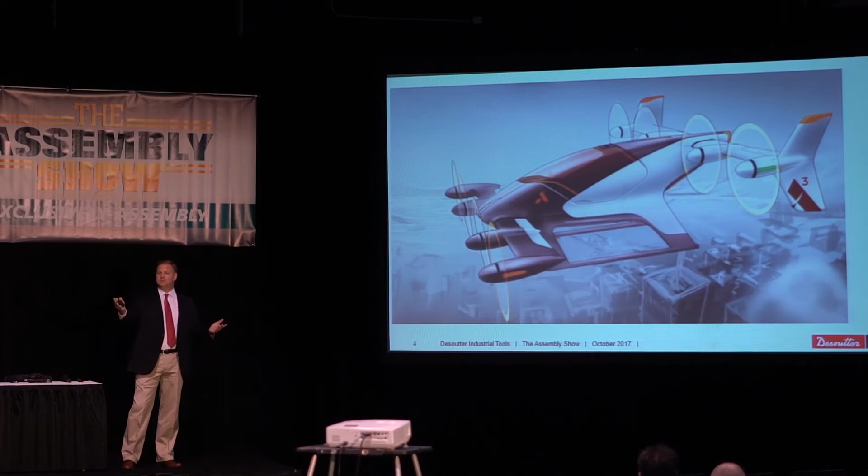Some yes, some no. But whether it's cars, trucks, or planes, they still all will need to be manufactured. And the way that is happening is changing, and it's changing quickly. We live in a changing environment. We're in a very different connected society than we were even 5 years ago, and that change will happen very quickly now.

There's many talks about Industry 4.0, so I'll try to move through this fairly quickly, but it's all relative to the Internet of Things, this connected world where our coffee maker, our assembly tool, our phone, our vehicle, all are interconnected, all can exchange data and information in a rapidly changing world.

Just in some numbers, by 2020 it's projected we will have 4 billion connected people. And even as you're sitting there, you're probably going to stay connected in some way to somebody else who's outside this convention hall. This represents a $4 trillion economic opportunity. By 2020, the projection is there will be 25 million different apps available to consumers. And by 2020, 50 billion embedded smart devices. So again, a rapidly changing landscape.

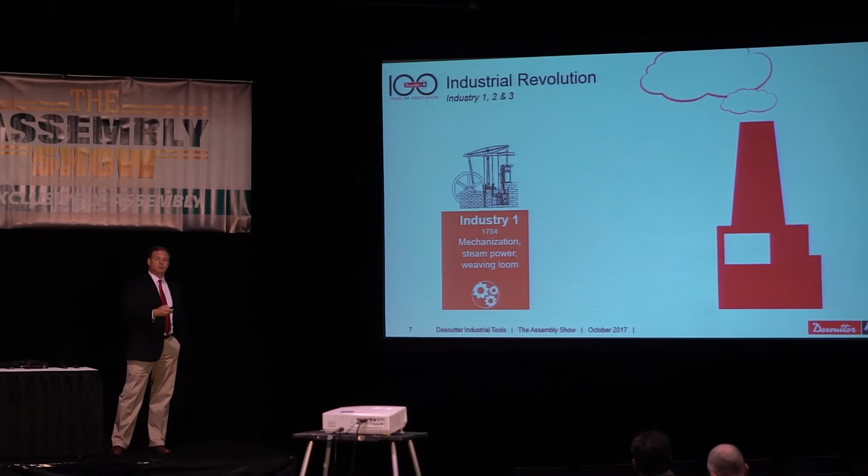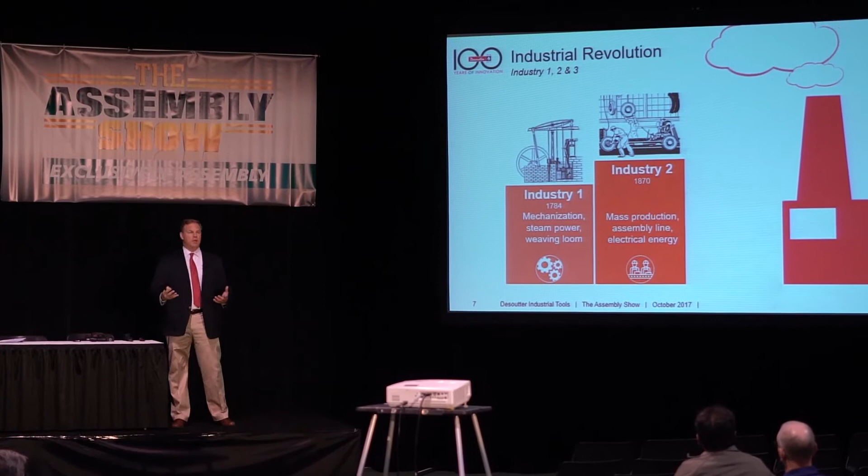And it all is reflective of what we call Industry 4.0, which follows, of course, the first three industries. Industry 1.0 being the introduction of steam engines into the workplace. That was followed, about 100 years later, by the introduction of the assembly line. We often think of this with Henry Ford, but it really started in the meatpacking industry in the 1870s. And then that was followed about 100 years later with the introduction of the microprocessor.

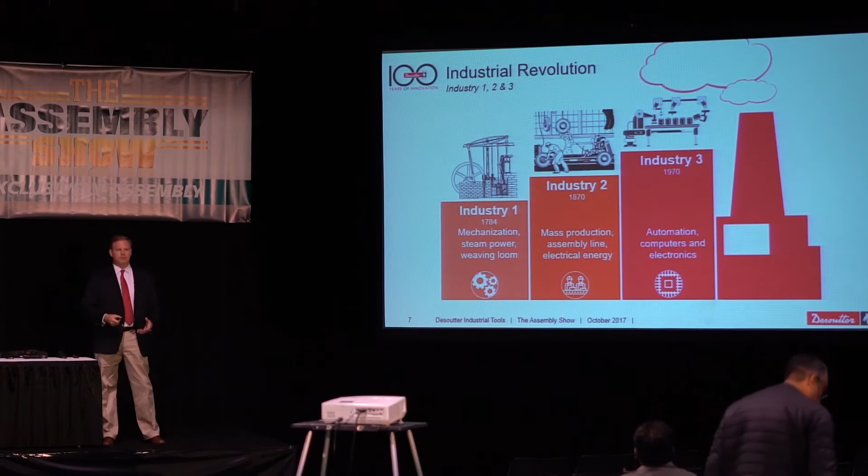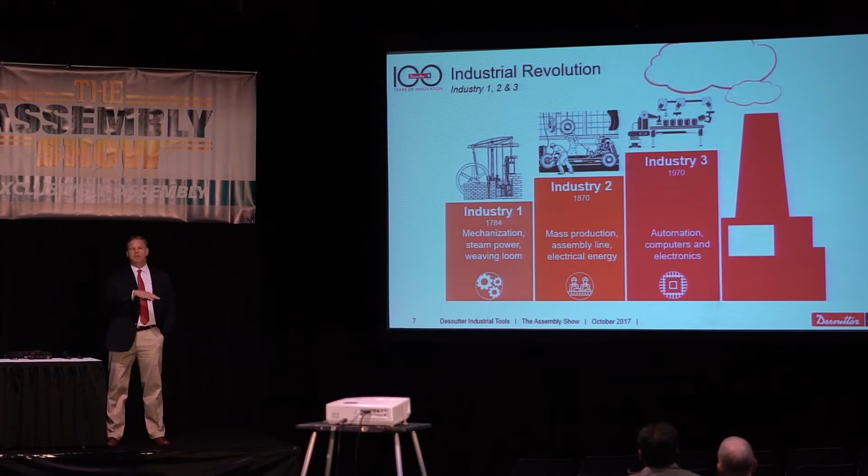And now we're moving to a more computerized world, with PLCs and things that can control our functions. But those are really the first three, and we've operated very much in this Industry 3.0 world for a long period of time now. The change is coming, and it's here, and it's upon us.

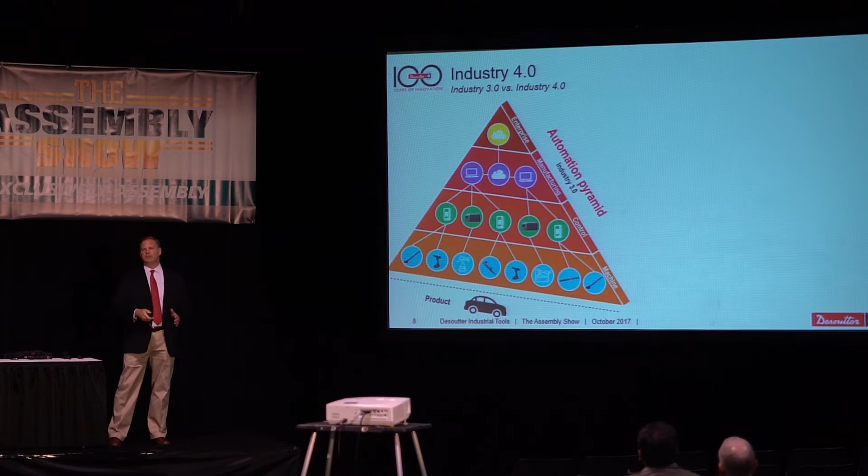Really the shift is from what was an Industry 3.0 world and way of thinking, which was rather linear. We had our tools, we had our PLCs controlling them, we were maybe collecting data on top of that in a very linear structure. The Industry 4.0 world is much more like a sphere of interconnectivity. We have multiple devices talking to multiple other devices or machines, and people interacting through this web of communication. It's important to think of this change so that it's not just a linear structure anymore, but really more like a three-dimensional sphere.

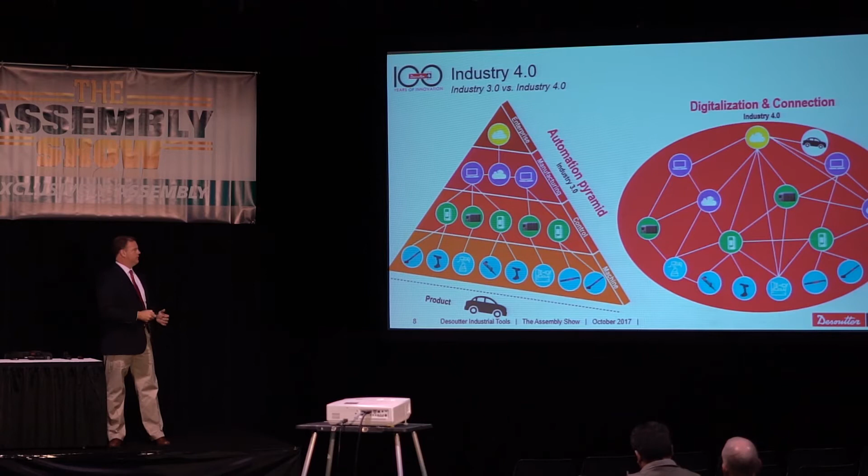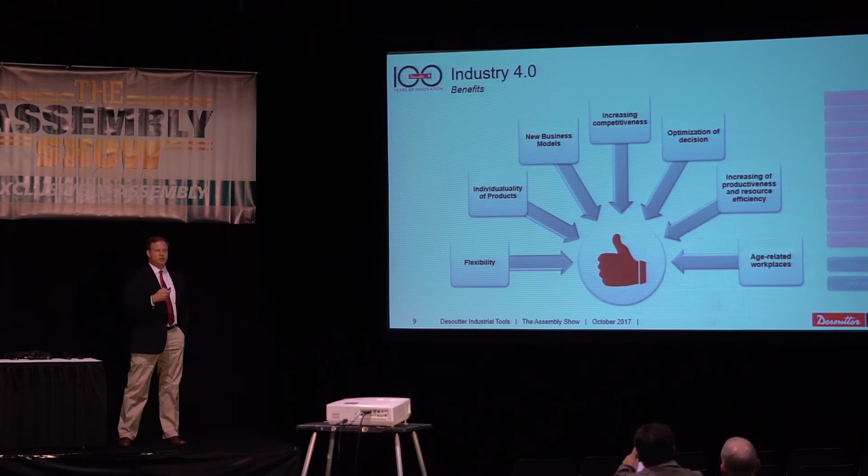So some of the benefits of that would be, for us, flexibility, much more able to customize products as we build them, new business models, really changes the competitive landscape compared to the people that adopt an Industry 4.0 mentality and those that do not. And then increasing productivity and the ability to adapt your workplace.

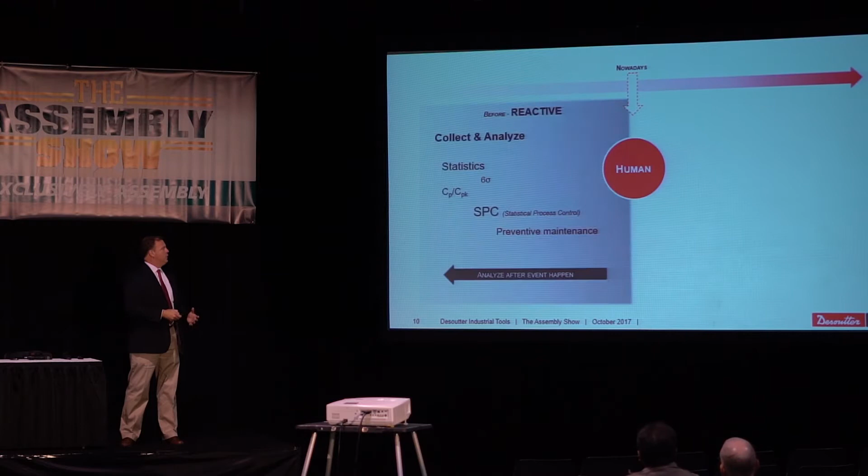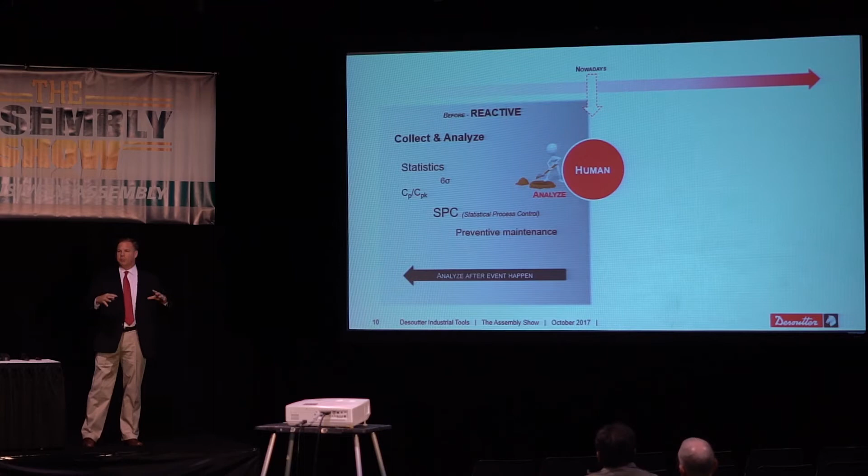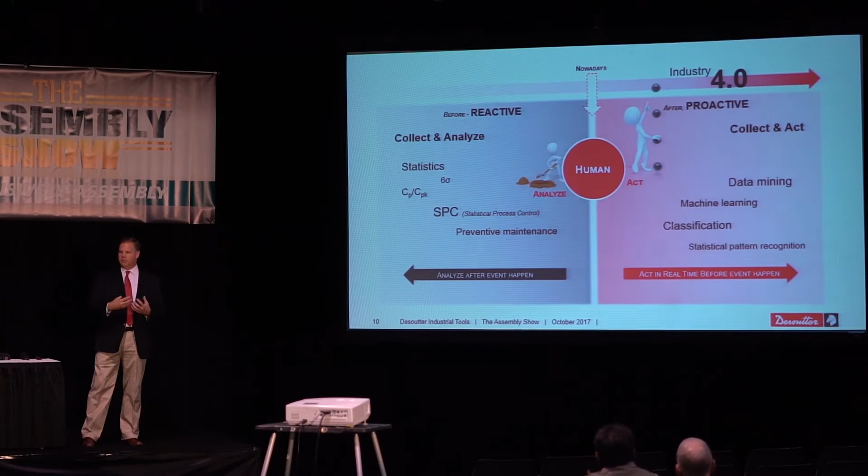Up to this point, we've worked in a way where the human interacts with their workplace, and we've been very reactive. We looked at the past, at statistics and processes. If we had an error, we'd put a process in place to stop it from happening again, but that process may involve unnecessary inefficiency. In the Industry 4.0 world, we become much more proactive, and not only ourselves, but our machines and devices, through the data they generate, can create a much more proactive environment for our manufacturing facilities.

What's really important for our organizations to understand is that if we don't have systems and processes in place now—if we're still using Excel spreadsheets to control our business and passing papers around in folders—you're not falling behind at a linear rate, it's actually exponential. So for every year you remain stagnant, you actually fall 3 years behind.

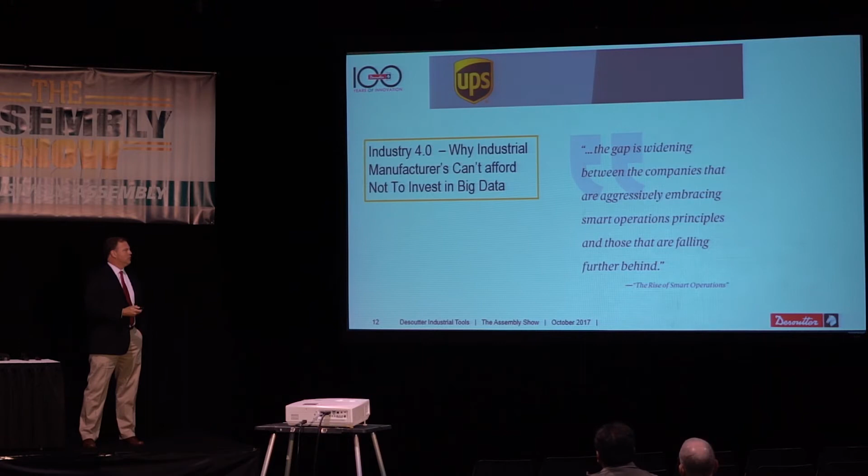The difference will become very evident 3, 5, 10 years down the road as to who adapted and who did not. These are some pull quotes from a white paper from UPS on the topic, talking in general about the landscape: the gap is widening between companies that are aggressively embracing smart operation principles and those that are falling further behind.

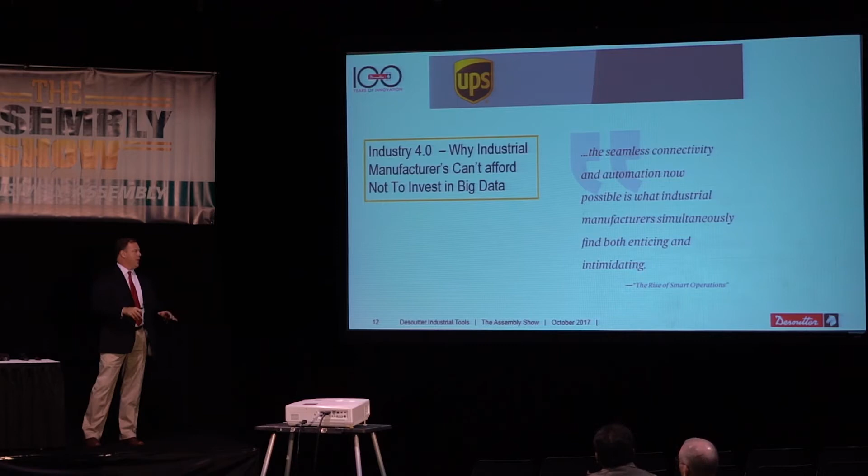Furthermore, the seamless connectivity and automation now possible is what industrial manufacturers simultaneously find both enticing and intimidating. Kind of like the pilotless plane or driverless car—it's like, hey, that's really cool, but I'm not sure what to do with that.

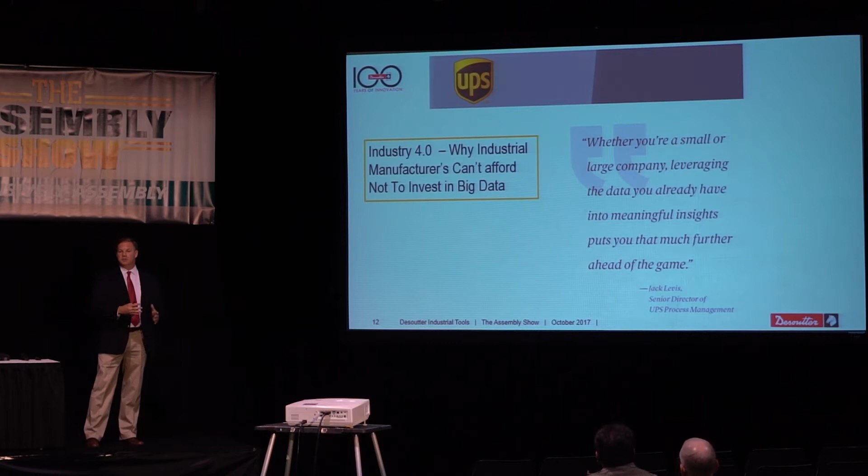And this is not just for the very large enterprises, this is very much for medium and small enterprises too. Leveraging the data you already have into meaningful insights puts you that much further ahead of the game. And this is across not just manufacturing, but transportation, retail—every industry is affected by these changes.

So what are some coming attractions from our company, from Desoutter? How do we address this change in the environment? What I'll talk about now are a couple of new tools.

But basically this piece is still mechanical. And while we talk about Industry 4.0 and the advancement to it, the rest does not go away. Those foundations of mechanical innovation and complexity are very important to this future growth. In a way, they become more important as we become more reliant on our tools and machines.

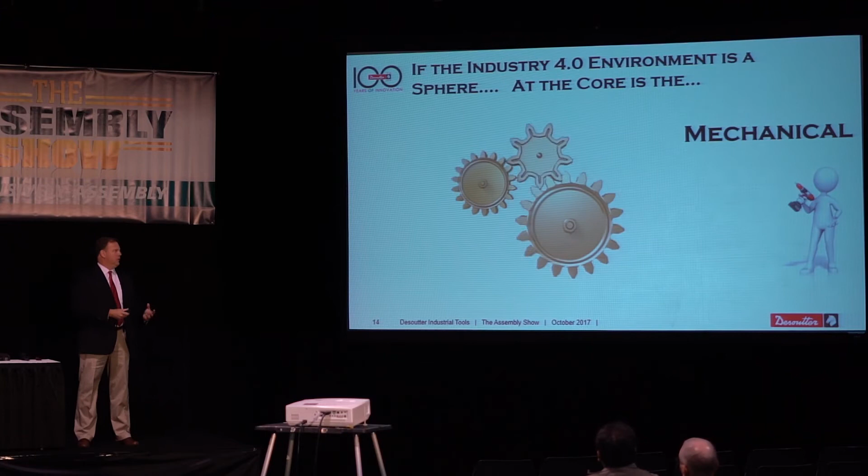They have to perform in the best way possible to meet the requirements of an Industry 4.0 world. So we talk about buzzwords we've discussed for years at this show: torque accuracy, repeatability, rundown strategies, ergonomics, power to weight ratio on hand tools, cycle time—can we reduce cycle times in our manufacturing environment? None of those things go away in the Industry 4.0 world. In fact, they become possibly more important.

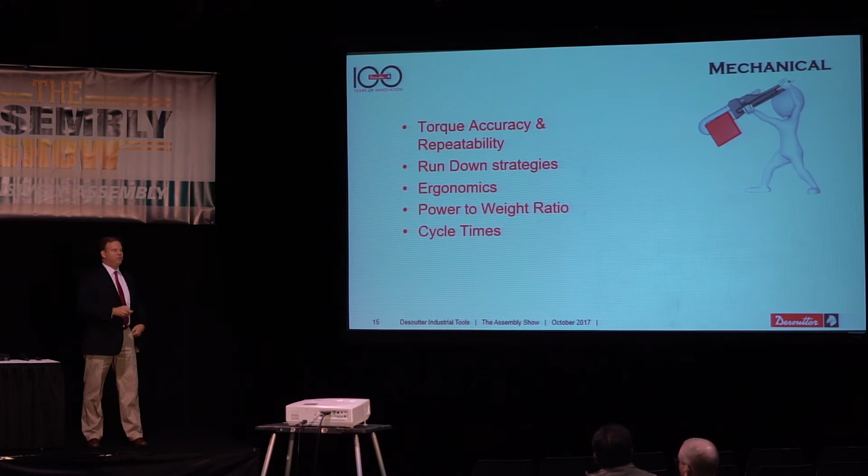So the first thing I wanted to talk about, which is really cool, is this tool from us: a cordless pulse tool. Desoutter launched the ePulse years ago, which was a cable tool. Great thing about it—it replaced the air pulse tool and some of the service issues that went along with that. Now the operator has an extremely ergonomic tool.

With this tool, I could run a bolt down to 25 Newton meters with absolutely no reaction on my hand, wrist, or arm. This is very important for reducing repetitive stress injuries, which can be very expensive in a production environment. Now from Desoutter, this is available not just as a corded tool, but as a battery tool. The operator can literally operate without any tether to a controller, and they have multiple parameter sets on this tool.

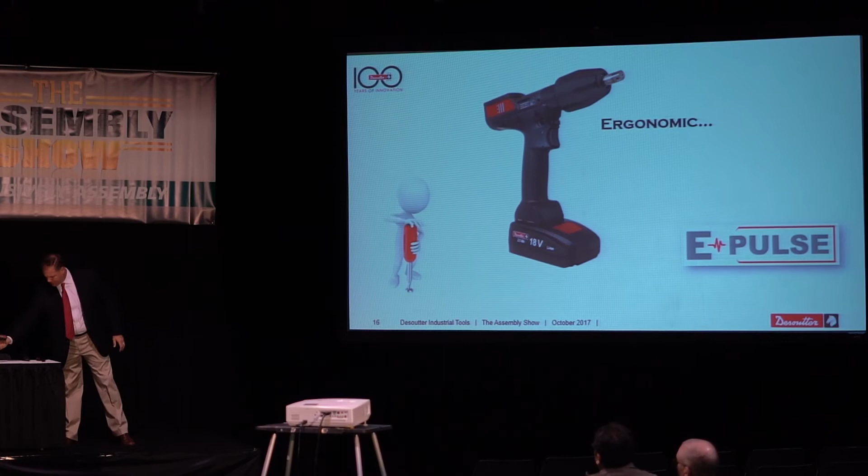They can perform multiple functions inside an aircraft, inside a vehicle, with this same tool. So next up would be this tool, again along the lines of ergonomics, basically a compact nut runner. Something very simple, up to 17 Newton meters, an operator can hold this in their hand. And when an operator can hold the tool in one hand and use the other hand, they become about 30% more productive.

It's very nice to take an angle nut runner and reduce this size, but still provide the ergonomic benefit of that. So this one's kind of cool.

In my current role now, I manage our aerospace team within North America, so I spend my time at Boeing and Lockheed and Northrop Grumman and places like that.

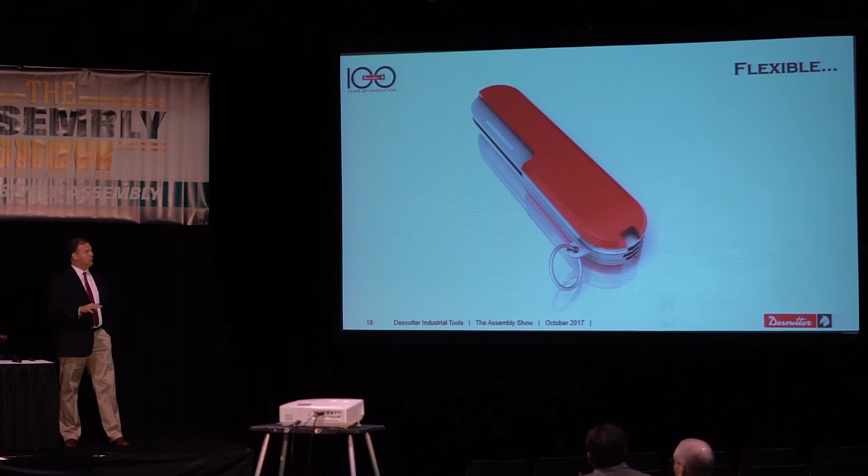So what do we think of when we see a Swiss Army knife? It does a lot of things. This tool will be the XPB. We'll launch it next year, and this is a cordless drill. So you see that? Okay, that's nice, a cordless drill. It runs at a high RPM, and that's great.

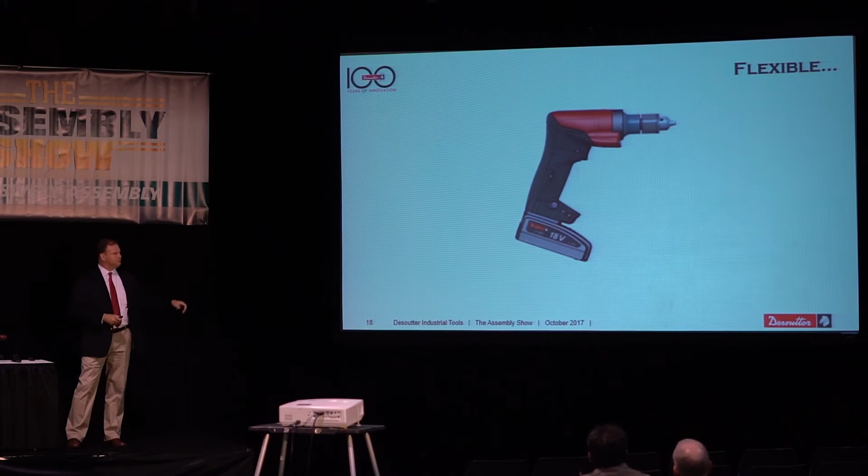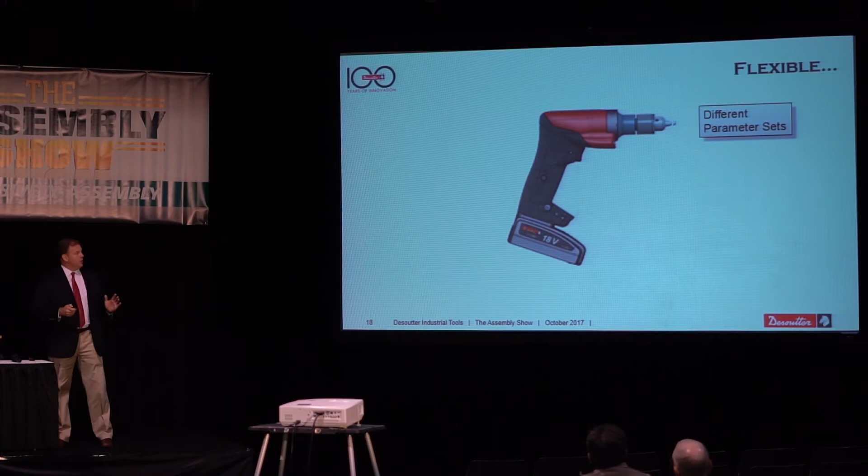But there will be 4 versions of this tool, and the next version will offer different parameter sets. Just like our torque assembly tool, we have different parameter sets on this drill. So now the operator literally can work on one application here, change their parameter set and their RPM, and drill a different material here. Nice innovation, but the next step for that is actually to add multiple outputs.

Through a special head, you can snap on different outputs, so now you do not have just a drill. We actually struggled with what to call this tool because it's not just a drill, it's something more. Now you have a tool that with one platform can do temporary fastening. You could do advanced drilling with hydraulic control. This will even have a head that will help the operator make sure that they actually provide the correct thrust throughout the drilling operation.

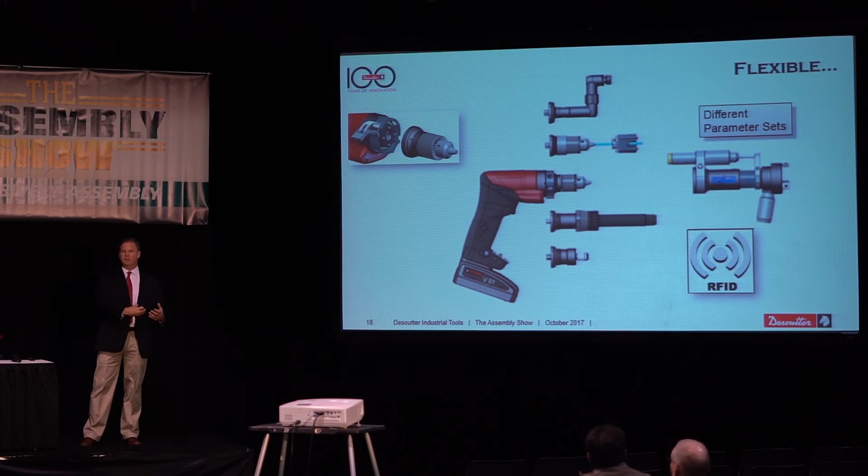Again, all interchangeable. And then the next piece of this would be RFID communication. With the heads individually tagged, now the tool knows what is attached to it and what process it's supposed to perform.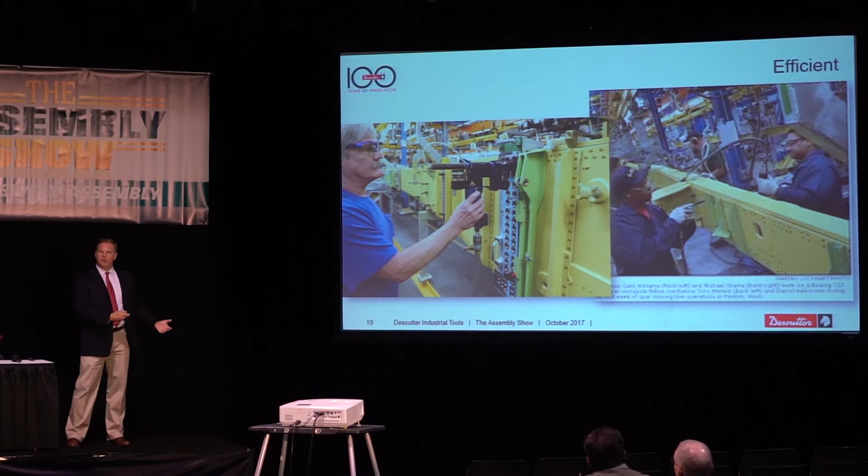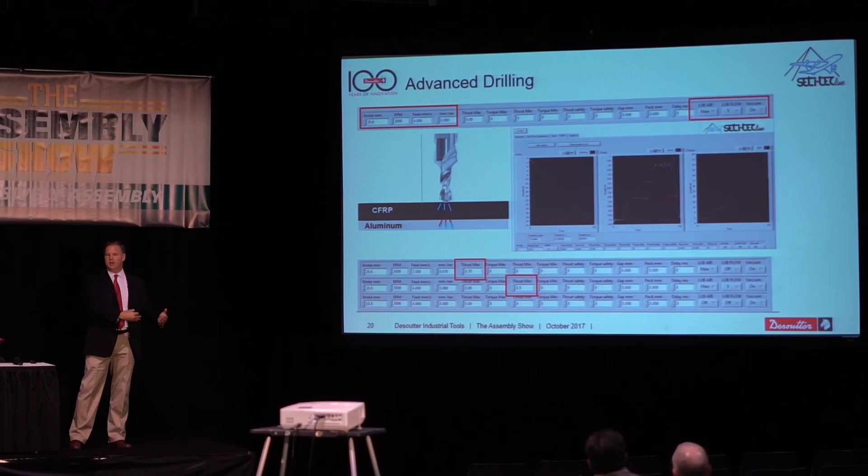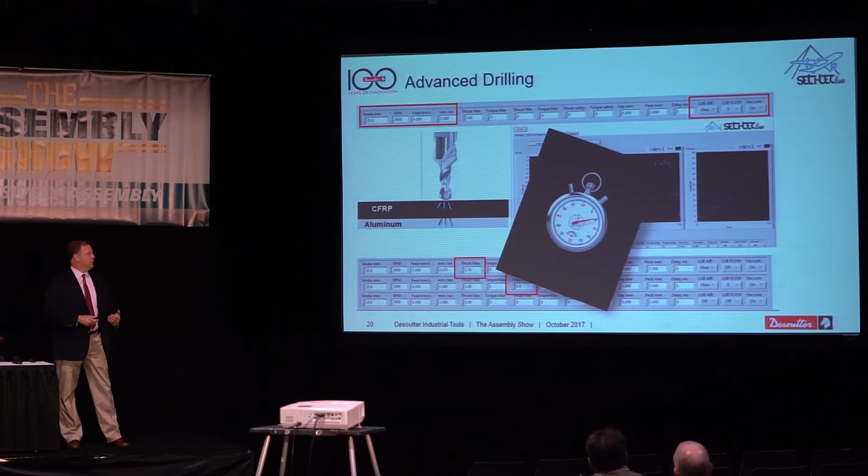What we've done at Desoutter and Setitec is advance that, just like DC tools, to an electronic drilling unit, referred to as the EDU. Now, just like a DC tool, there's an interface. You can dial in your RPMs and feed rates. Thus, you can drill aluminum and titanium much faster and more efficiently than you could previously. This takes the cycle time in that station from just under 2 hours to now something under 20 minutes. The drilling time moves to about 1 minute and 15 seconds with that tool because you can adapt to the materials. So, very important innovation, but I would say all of those are mechanical.

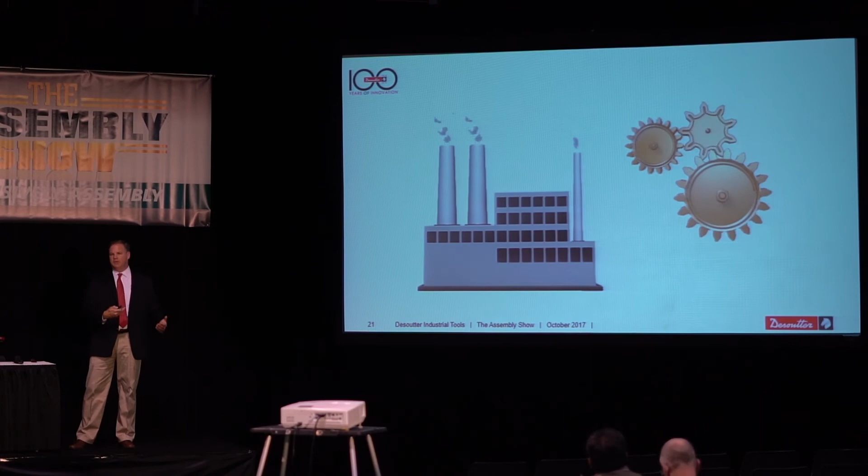All of those are Industry 3.0 types of innovations that we've seen come over the years, which are great, which are needed, but we're obviously moving to the smart factory type of environment.

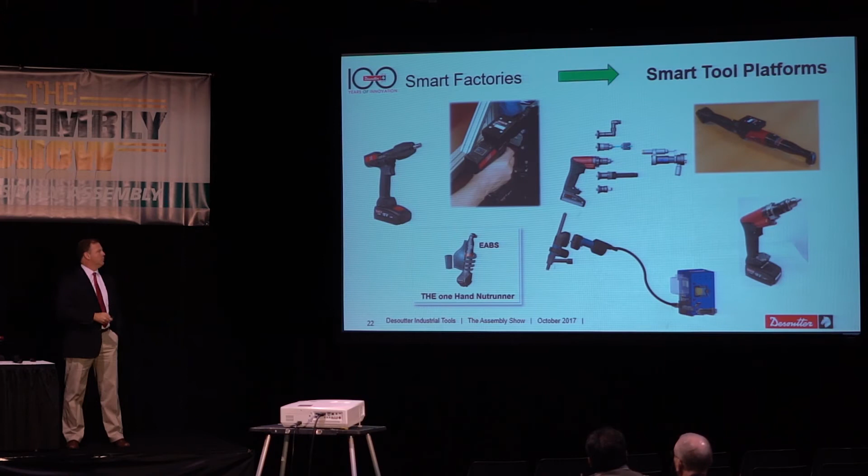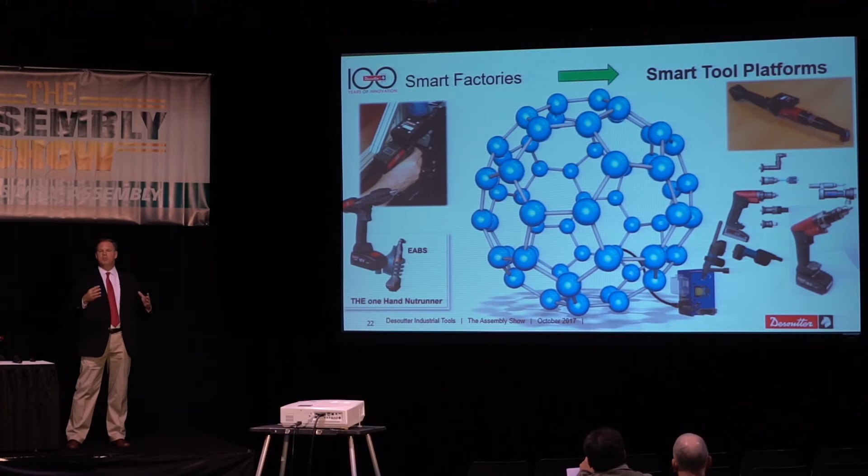So what Desoutter is doing, there's really a change of mindset. To this point we've had tools, and what will happen as we move forward is we have smart tool platforms. The tool really is not just a singular function tool, but a platform to perform multiple functions. So everything I just talked about and more, what's cool about them is they can all be connected. As we talk about this Internet of Things, they can all be connected into this new production environment, so they all become a platform.

To help facilitate that connection, Desoutter will launch next year a new controller, really being referred to as an industrial hub, the Connect. And the Connect is a new way of controlling tools.

So you'll have an inventory, or on your line a number of battery tools that can operate, and through the use of the Connect, you now have something new. If you've ever bought a car and you wanted one particular feature but had to get the highest level model to get that feature, you won't have to do that with the Connect, because it will be feature based, and you'll have much more flexibility as to what you put on the controller and what you don't need for your particular application. Then within the production environment, you can move those features around from controller to controller as needed, and rebalance your tools and move them around the production line facility. So again, a much more flexible concept in the new production environment as far as controllers are concerned.

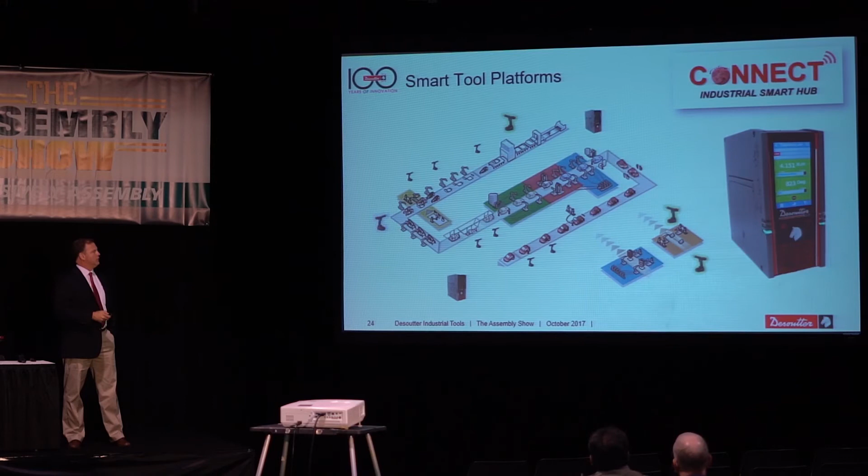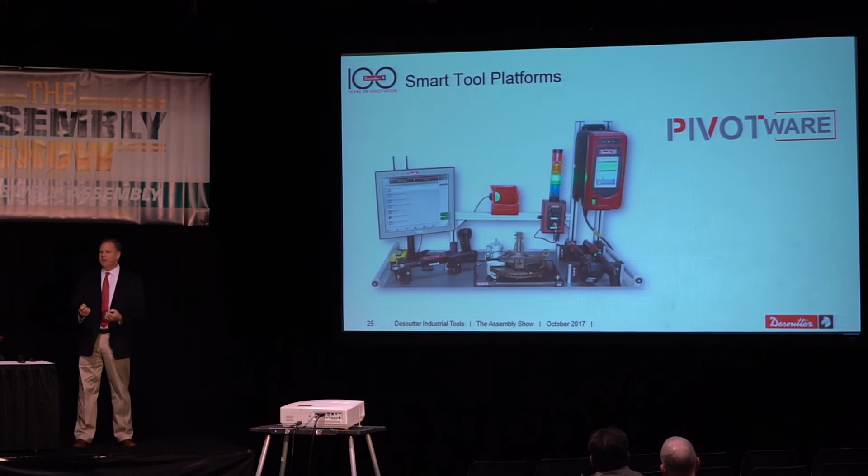So we've got tools, we've got controllers, but we need to control processes as well in this new Internet of Things world. So Desoutter offers a process control platform, which is Pivotware. And with Pivotware now, we can control all of these tools that I've talked about, but anybody else's tool, or anything that has a sensor or intelligence, we can now control that and add that into our process.

What's cool about Pivotware, and what's really nice where we are in this stage of development, is that it is scalable. It doesn't have to be an enterprise-wide initiative. Pivotware can be added from the single station onward, and then you can build up, but you can keep trend with what's happening in the Industry 4.0 environment. So a very scalable environment.

It could be a simple assembly station. It could be an entire line. It could be the facility, or it could be multiple facilities. But it's scalable and something that can be layered on as needed, as the company deems the investments worthy to move into the smart technologies.

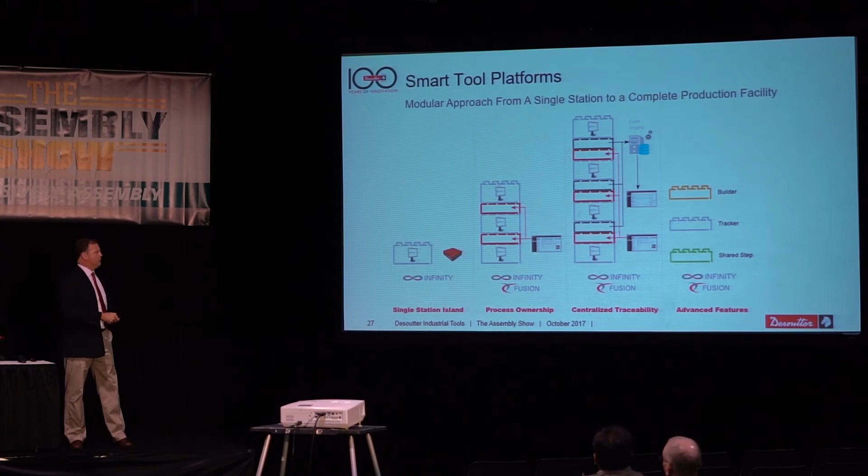So that's all great, we talked about processes and tools. We have this advancing platform, but what you'll see here, and what also is new from Desoutter, and you see a lot of it at the show now, is automation. Automation typically has been thought of in the Industry 3.0 world as large cages, robots that are protected from people and people protected from them with lockout tags and things like this.

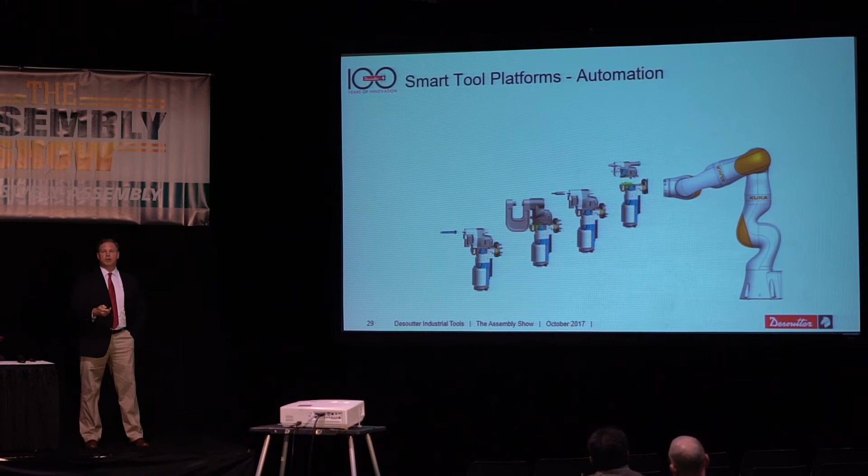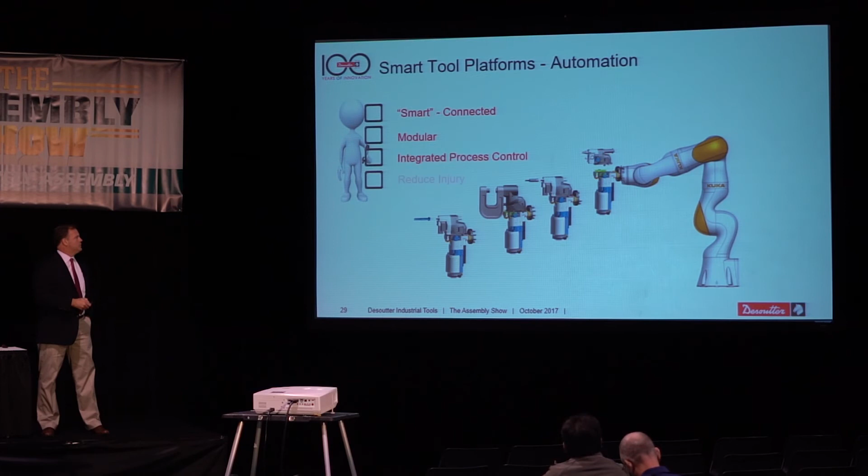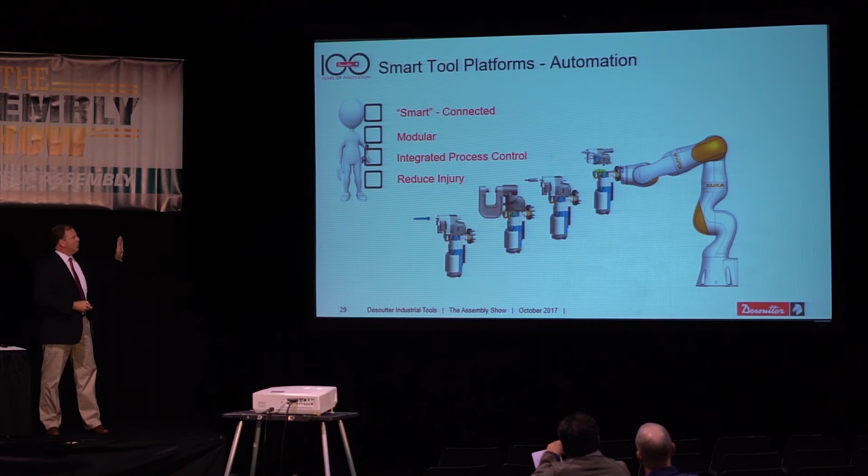And automation is becoming much more small scale. So what we're working on, as you saw the drilling application earlier, is marrying cobots, small robots that can work with people, with our Seti-Tec line of drilling tools. These tools will be able to not only fasten, but they could possibly apply sealant, do riveting, and some of those functions that are very difficult, when I showed the spar assembly line. Riveting is a very unergonomic type of process that is still very prevalent in the aircraft industry and others as well. So big opportunities to reduce injury, integrate process control, and more.

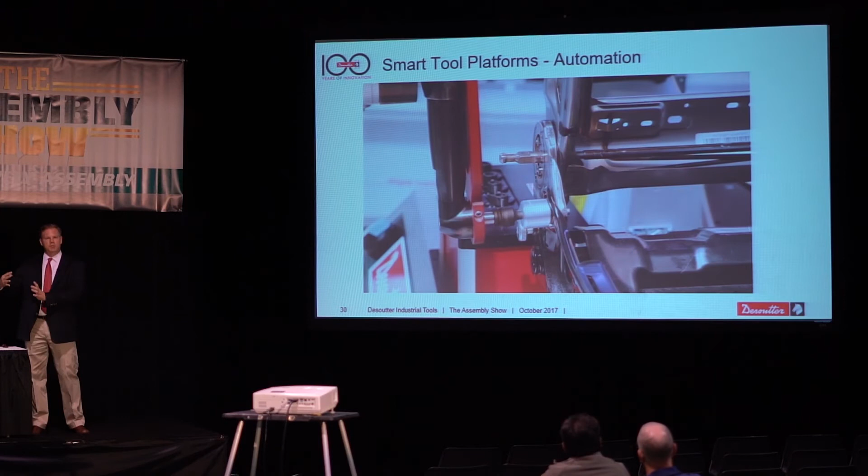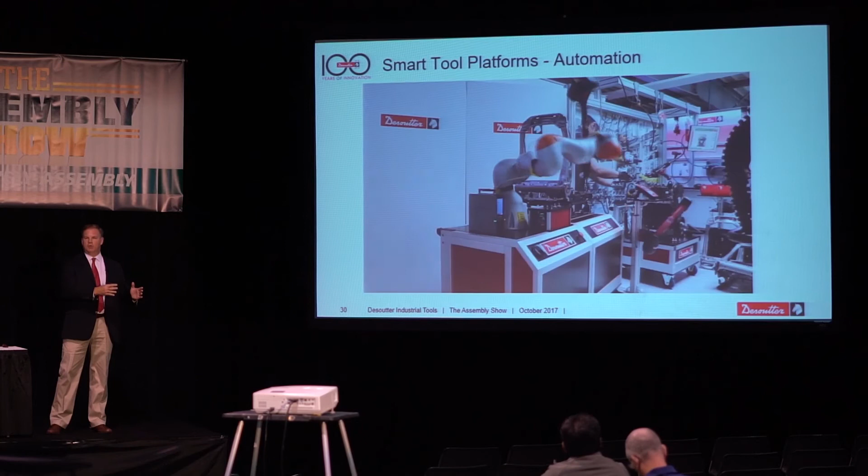And this is not just true for us in aerospace. The same things are held true for some things we're working on in relation to automotive assembly. So here again, I showed where you could picture in Boeing, maybe the gentleman's doing his drilling, and next to him would be a cobot doing riveting or something else. Obviously, in the automotive assembly plant, you may have cobots on the line as well, performing functions that might be difficult for people, or we can rebalance the workforce to a more efficient layout.

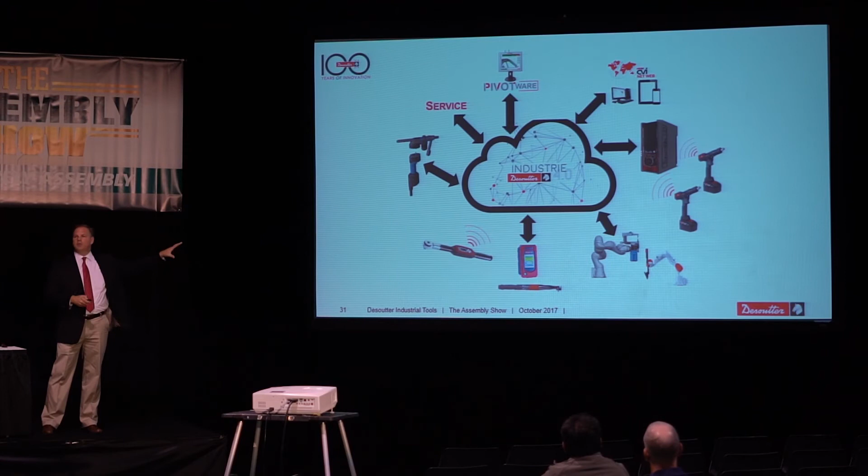So, again, all things that Desoutter is working on now. We have this whole environment of smart tools, Industry 4.0, and the movement forward. I wanted to talk a little bit about the Industry 4.0 environment in general, because the key to it, as we mentioned before, is data.

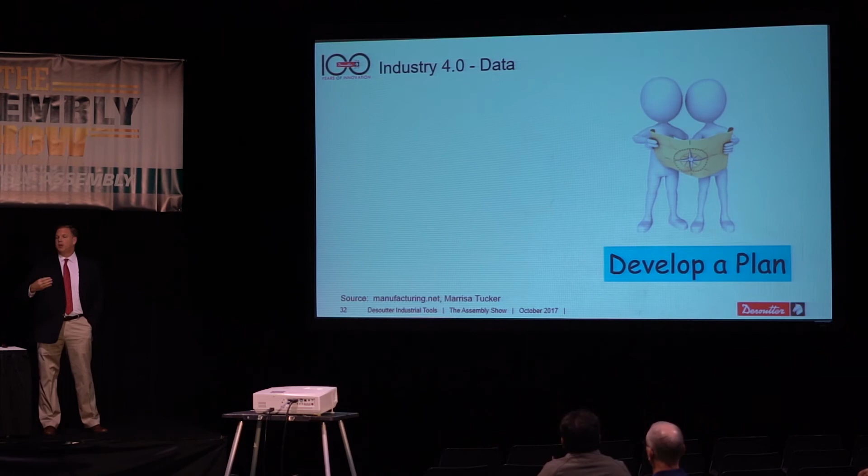And what do we do? What if you come to this show and think, wow, everybody's doing Industry 4.0. What can I do at my facility? I'm a small-sized plant, I'm a medium-sized plant. The first thing they say when you read on the topic is really, just develop a plan. Start now. Develop a plan for what is coming and what is changing.

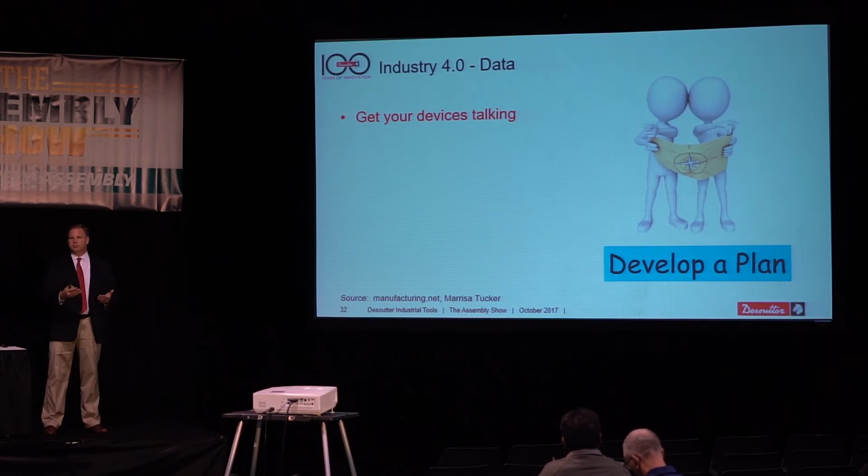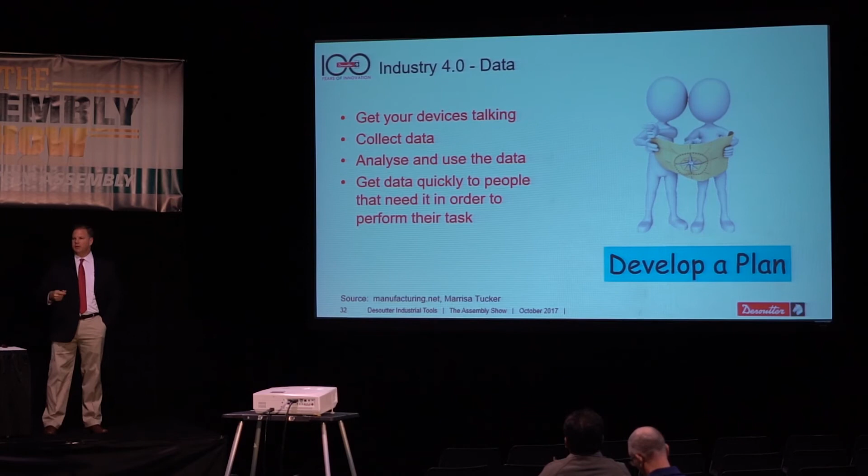And one step of that plan is simply to get your devices talking. This can be the tools that you have, this can be other things with the addition of sensors, but try to start to get your plant and your devices talking. Collect the data, and when we collect the data, use that and analyze it. And the thing when we talk about data, that there will be all of this data collection in the future, actually you probably would find you have a lot already. It may not be in use, but you're already collecting quite a bit of data. Get that data quickly to the people that can use it and make better decisions.

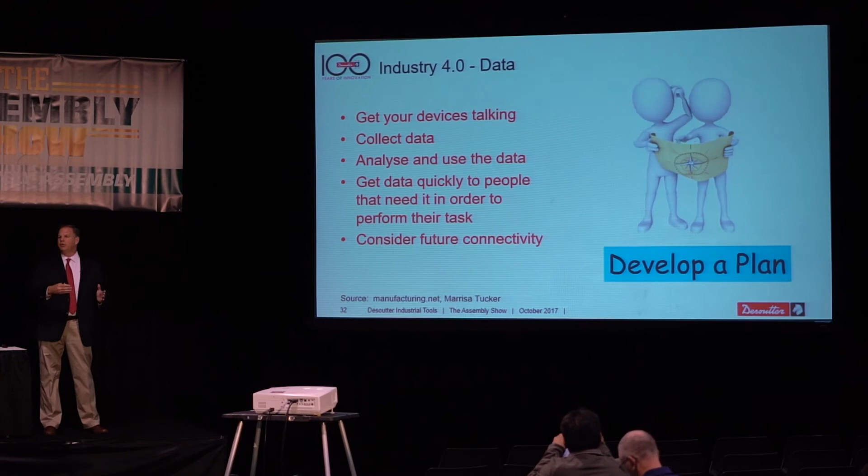But key to this also, as I show these products and products you'll see here at the show, when you make decisions now about your factory, don't always rely on what was tried and true, but really consider connectivity. How will this investment in tool, line, whatever, how will this connect into my future environment? Where do we want to be?

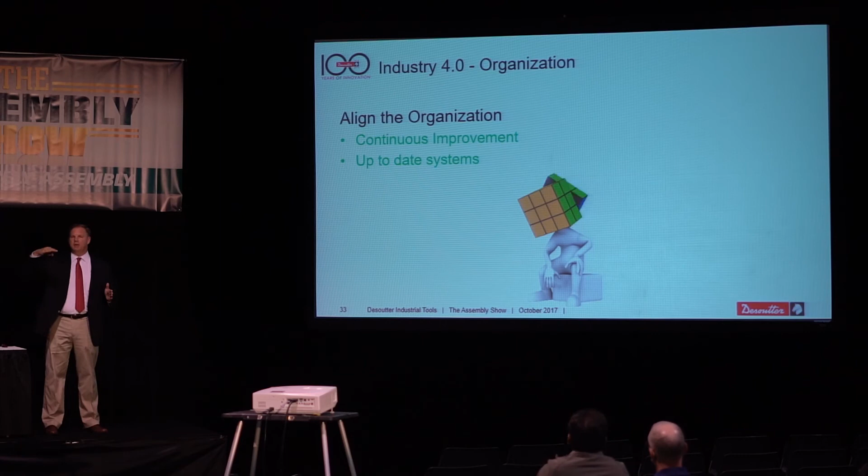Make that a culture of change within the organization. I find when we talk about the organization, it's very important that the message of continuous improvement is prevalent throughout the organization. This can be very foundational to some organizations. They might think, we've always done things this way, it's always worked, so there's really no need to change. And you won't see any real change in your business in the next few years to come, but down the road that could be significant if actions aren't taken now. And as I said before, if the systems aren't up to date or are very antiquated, the change is happening exponentially, so it will occur quickly, and one can quickly fall behind.

We find, as I've talked about tooling, process control, and automation, when we go into a facility, oftentimes these are completely separate organizations. We'll talk to the assembly people, this is great, but the automation people are a completely different group of people. And all of this involves the interaction of the IT teams, which sometimes are only involved in things after they've been purchased—okay, how are we going to connect this thing that we just bought? So the systems, the automation, the assembly need that matrix organization, so there's that sharing of information, sharing of decisions and processes as we move forward.

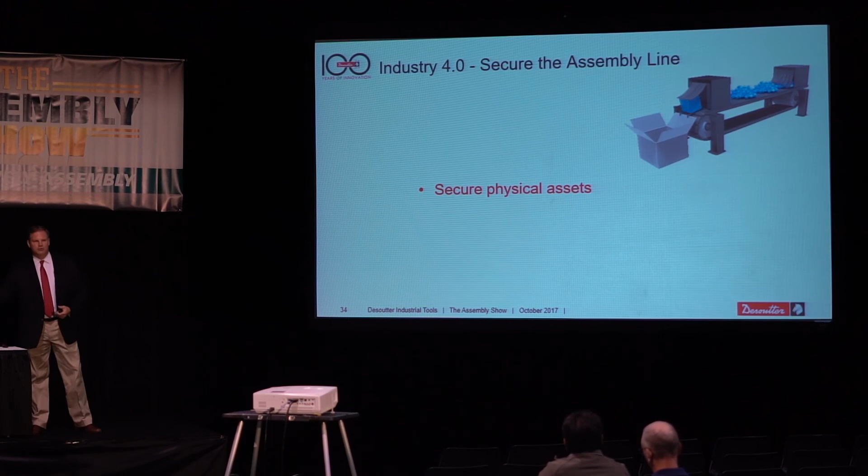And then it's very important to secure the assembly line. Obviously we would secure a physical asset. We would go into our facility and secure the tool, the computer, the desk, whatever it might be, the coffee maker—they all get an inventory tag, and we're used to securing those things. But we have to secure data as well. Data is an intellectual asset. Your company invested time, money, and energy to create that, just like they did the products that they produce. So it's very important that it's treated as such.

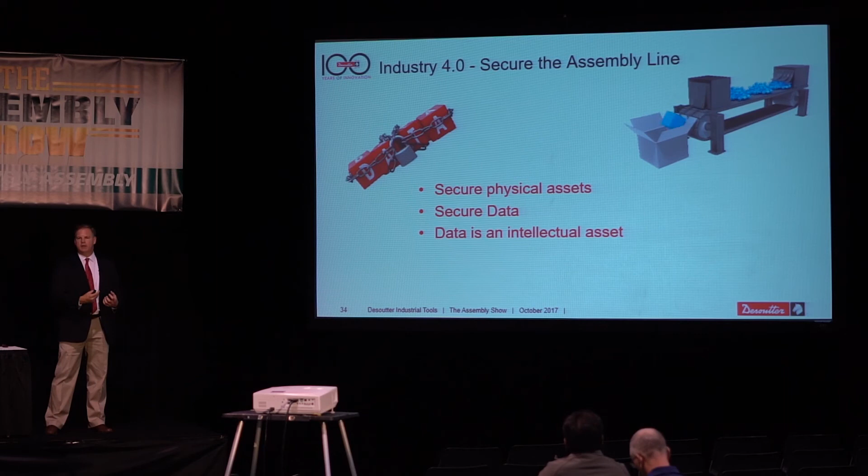Some of those treatments would include ensuring that it's being used correctly and ensuring that its access is controlled. Furthermore on data, very basic thing, obviously we want to back it up. This does not always happen, so it's something to take into consideration. How will it be stored? Will this be stored within our enterprise? Will this be stored using cloud-based systems, this type of thing? These types of decisions need to be made, and these types of systems are available in today's world.

How will we define it? As we build data, it becomes a data-based society, and we need to disseminate who gets what. The management team obviously needs a different set than the production team or the process data, so we need to see which set is correct for which people.

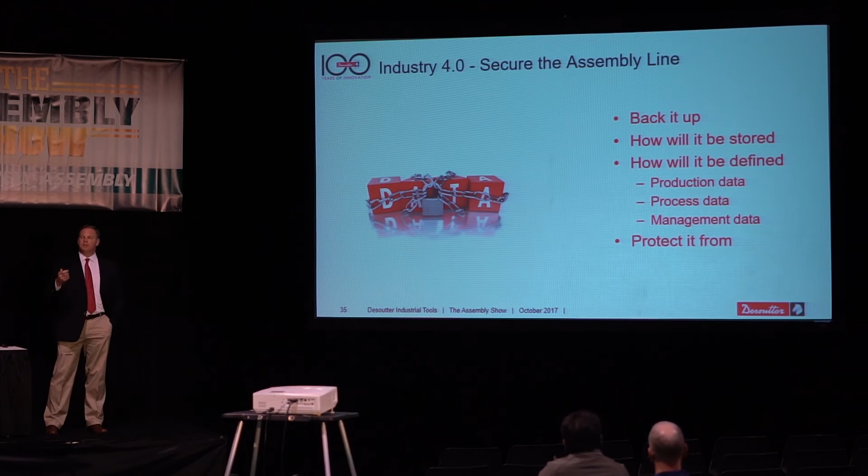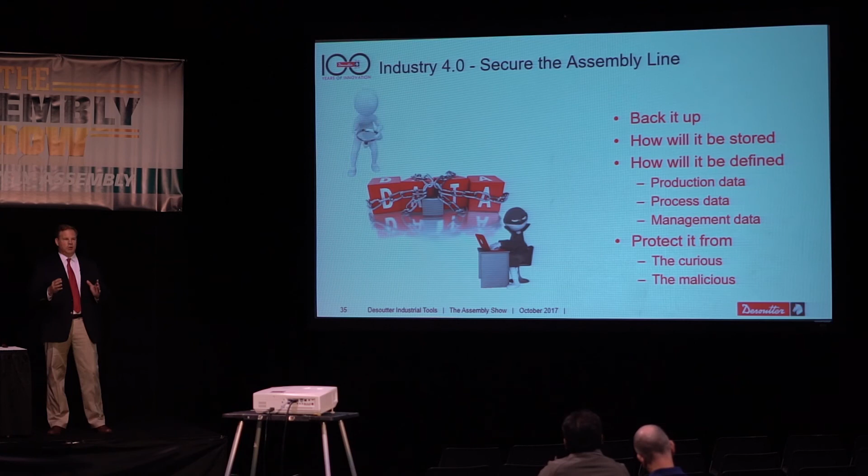It's very important that we protect the data - it's an asset that needs to be protected. In this business, selling tools and controllers, we always run into the curious: people asking what happens if I push this button, change this program, change this cycle. Oftentimes the curious, while well-intended, cause bad results. So we need to protect from them, but more importantly from the malicious. Every day you can read news stories about systems being hacked, companies taken over for ransom.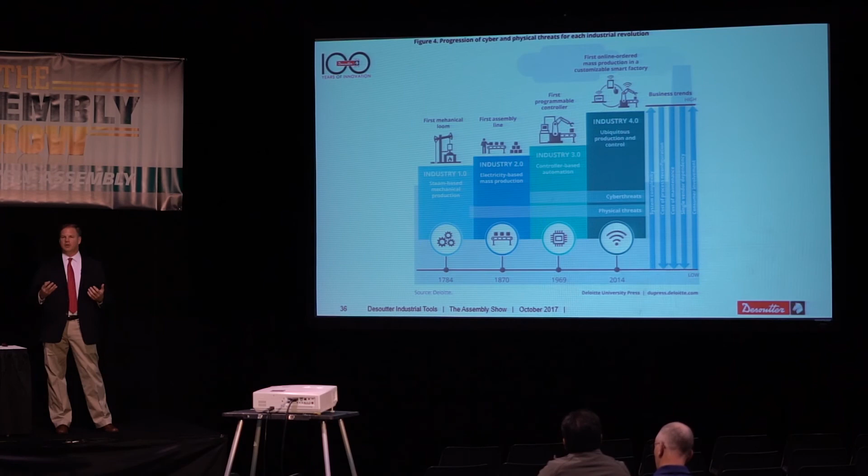Industry 2.0 brought the mass production line - great innovation, but early production lines were very difficult and risky places for workers. Repetitive stress injuries alone were very significant in an Industry 2.0 world. As we moved into Industry 3.0 and 4.0, cyber risk becomes much more prevalent.

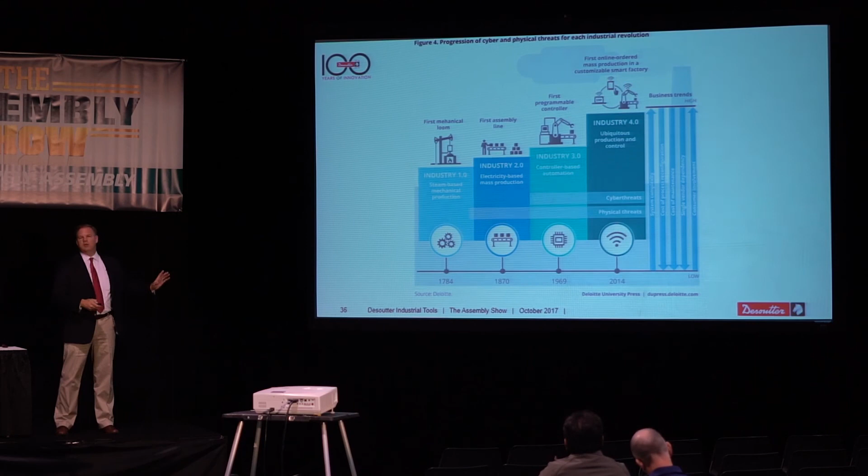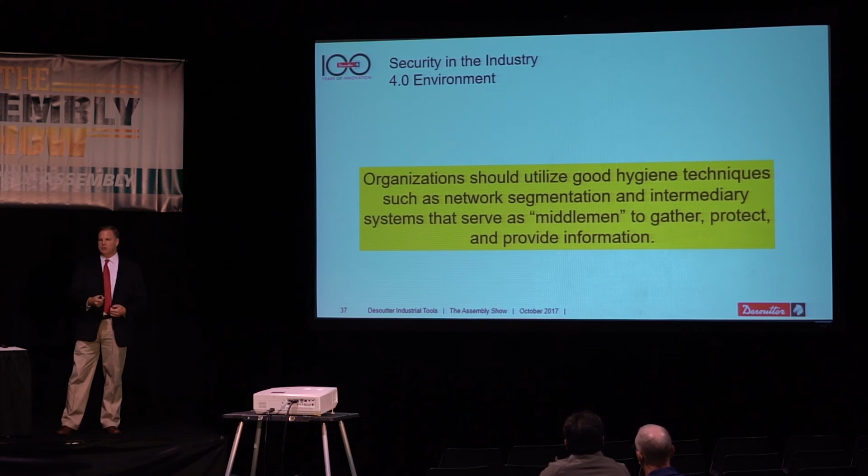The key thing is to develop your plan accordingly - just as you develop an Industry 4.0 plan, develop your cyber risk assessment. I like this quote: organizations should utilize good hygiene techniques such as network segmentation and intermediary systems that serve as middlemen to gather, protect, and provide information. What I liked was the idea of good hygiene - developing very good practices from the outset for our intellectual assets, just as we would for physical assets.

There's a lot of information one could read on this, but in this case they look at it as three separate functions: the digital supply network, where your organization communicates with outside suppliers, customers, and so on - is that network protected correctly? Then you have the smart factory itself and its processes, and then the actual connected object and its protection.

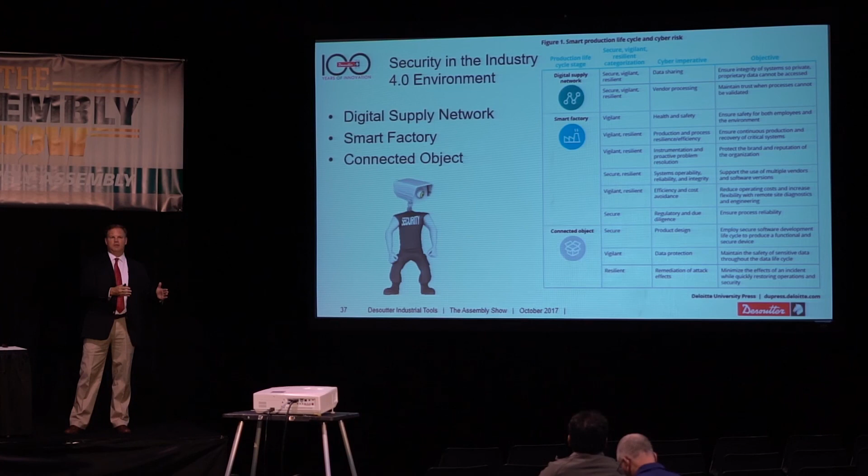They looked at it at three levels. First, we need to secure it. Then we need to be vigilant in that security, aware of oncoming threats. And lastly, be resilient, be flexible to change. We can't put security systems in place that limit what we're trying to achieve in the connected world. There's an obvious balance, but the key is to think of these things simultaneously as one advances into the smart assembly world.

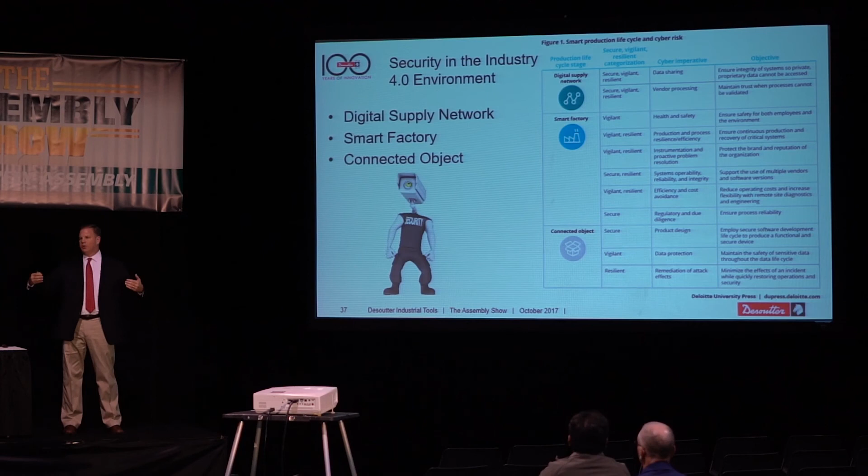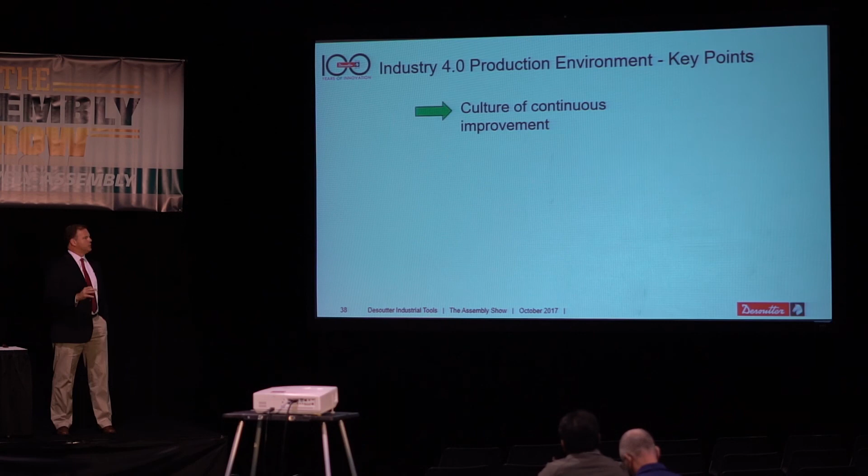So to sum this all up in one simple slide: it's very important now that you have a culture of continuous improvement. In addition, what you can do right now - think about this at the show - get the devices talking. We have processes in our plant where we're not collecting any data or information, so we take that data, collect it, and use it.

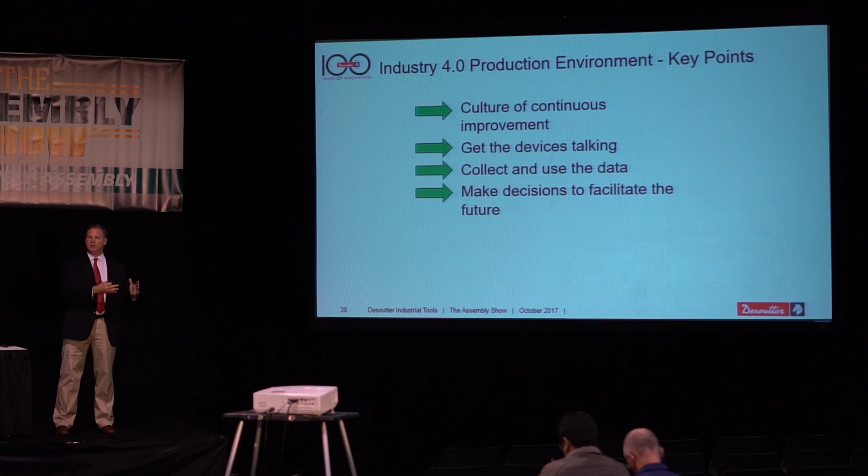Also very important, as I stressed earlier, make decisions now that facilitate the future. What will your plant look like in 5 years, 10 years? Are we making decisions now on things we can scale in, like pivotware or smart tools, that will connect to future innovations? And develop a parallel plan for your cyber risk - be ready for that, even if you're a small or medium-sized manufacturer, take that into account as you develop this.

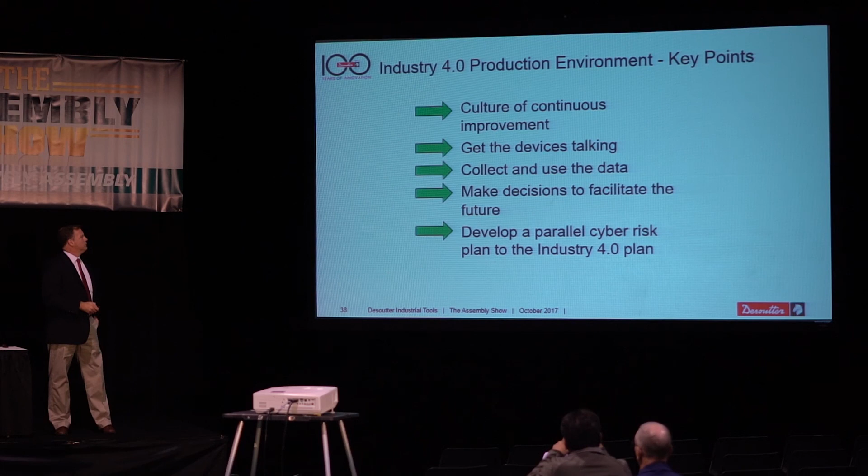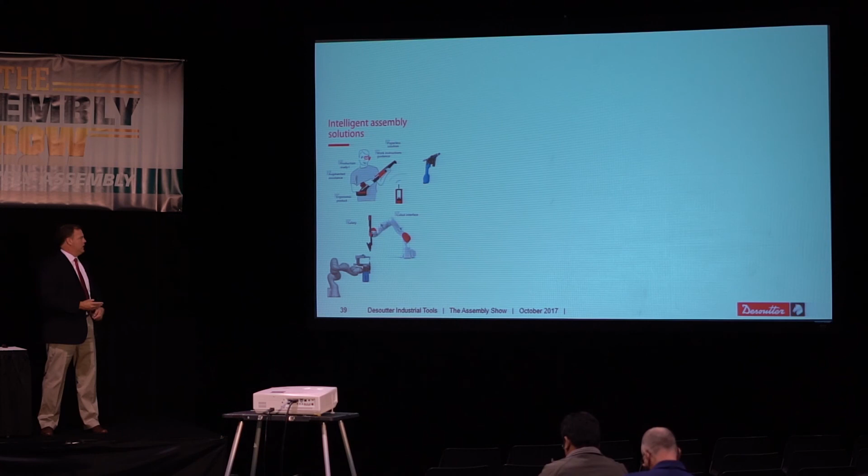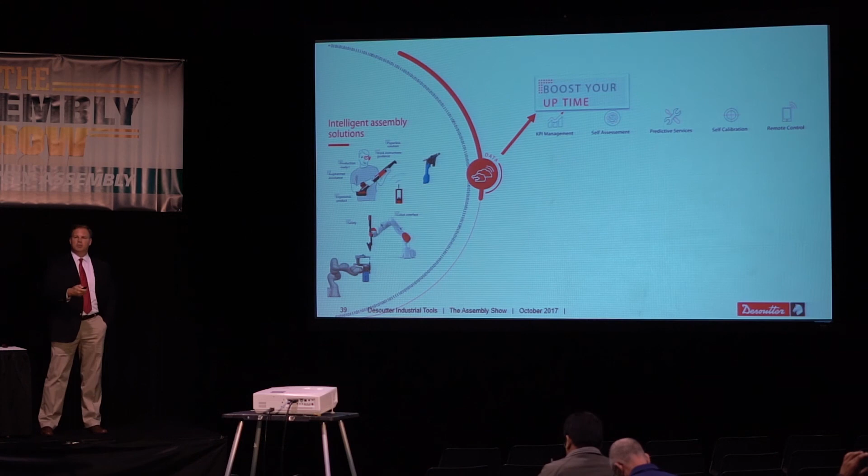Here at Desoutter, we are working on a world of intelligent tools - assembly tools, drilling tools, tools used in manufacturing that have that future consideration, all able to produce data, which is key in the Industry 4.0 world. And with that, it gives the ability to boost uptime, boost flexibility on the plant floor, and ultimately boost productivity.